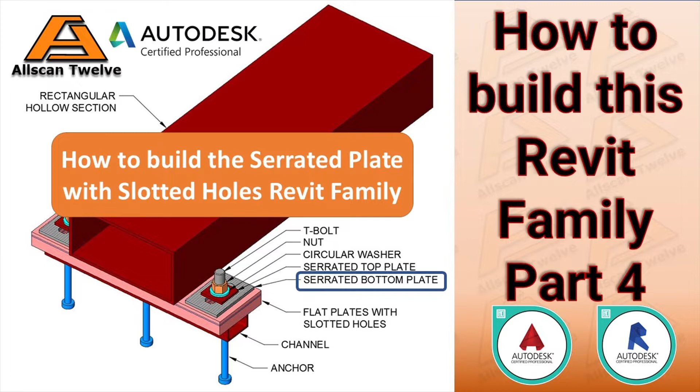Allan Cantos is back again for another video on how to build a Revit family, and for today's video, I will show you how to create a serrated bottom plate with slotted hole voids Revit family. Let's get started. Open Revit, create a new family, and I will be using the metric generic model face-based family template.

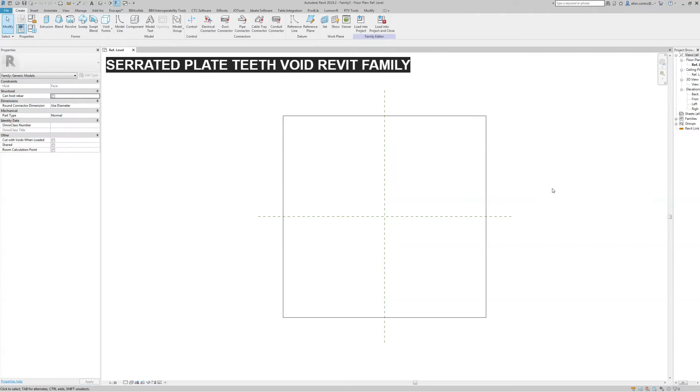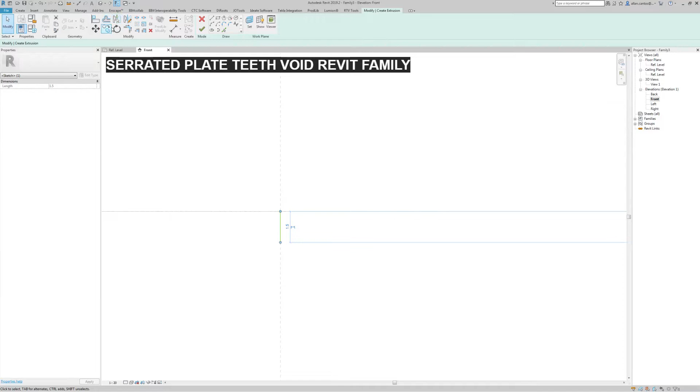We will begin by creating the teeth void of our serrated plate. So go to the front view and we will trace the teeth void profile. Create an extrusion. Make a vertical line at 1.5 mm tip and rotate it at 45 degrees as shown. Extend it to the reference level and mirror it as shown.

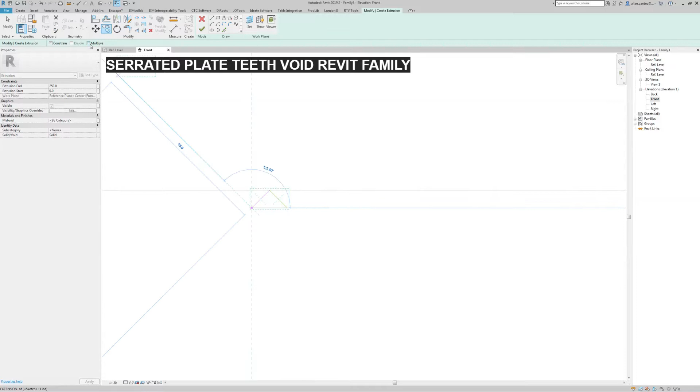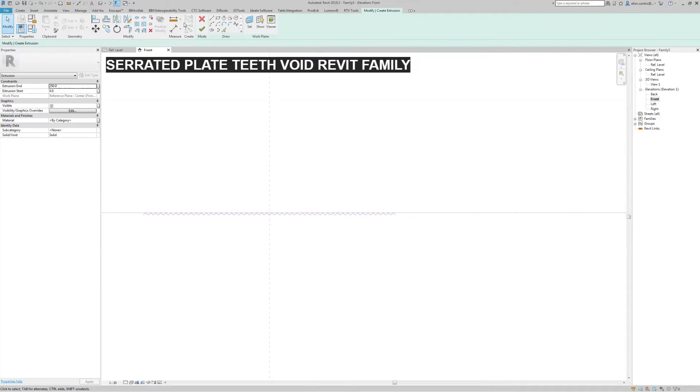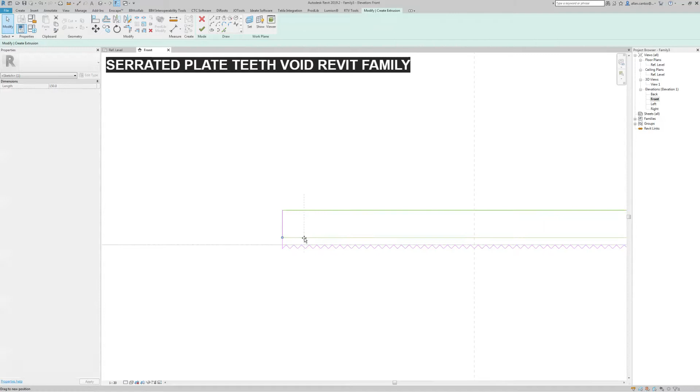Then copy it for about 25 multiple times. Next, select everything and we will mirror it to the center line. Let us complete the process of making this a closed polygon as shown. Once we are happy with the shape, click the check icon to accept the changes.

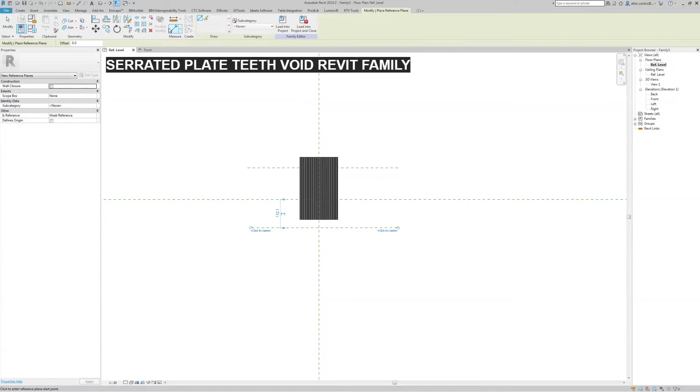Next, go to the reference level, drag it a little bit upwards, then we will add a couple of horizontal reference planes. Add dimensions and make it equal to the center line. Then add an overall dimension. Select the dimension and we will assign a shared parameter. And let's call it flat plate width.

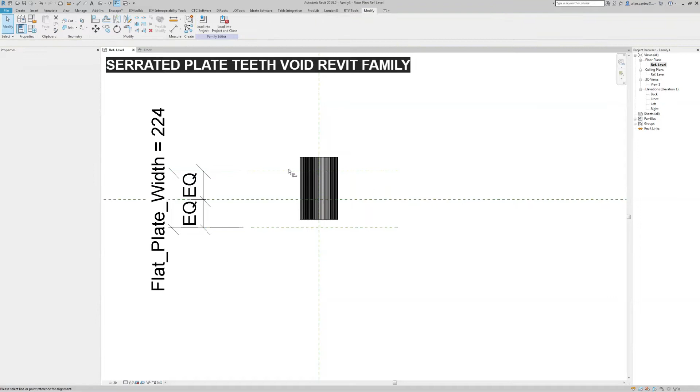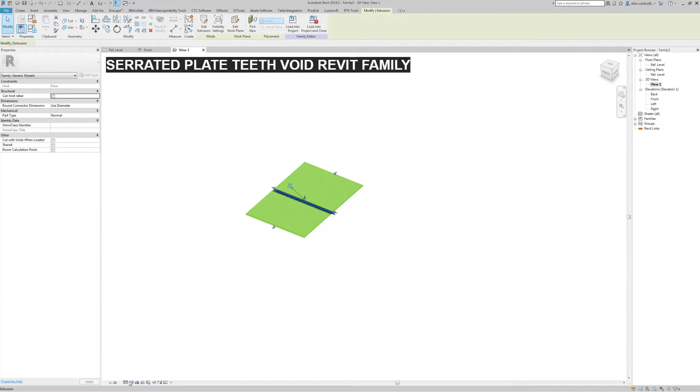Next, align and lock the shape to the reference planes as shown. Next, go to the 3D view. And we will convert this from solid to a void. Then using the cut geometry tool, let's create a void to the face. And now we have created the tooth void profile.

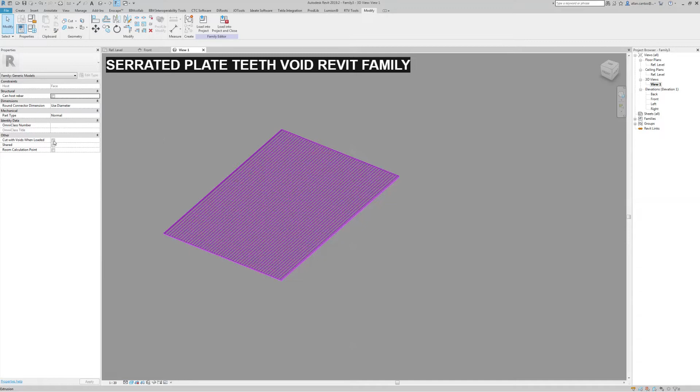Next step is to make sure to tick the box saying cut with voids when loaded. Now we are ready to save the family. And I will call it Serrated bottom plate teeth void.

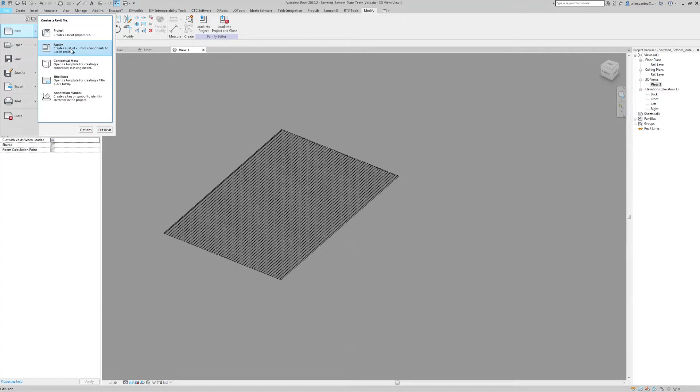Next, we will recreate the flat plate, but this time we will be using different parameter names. So again, create a new family and I will be using again the metric generic model face-based family template. The process is going to be the same from the last video. The only difference now is that I will be using different parameter names.

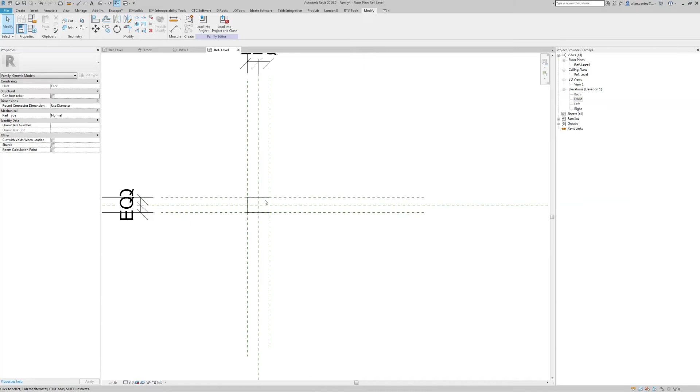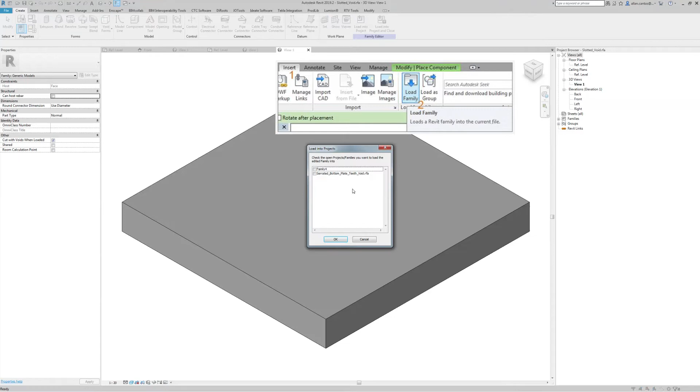Now that we have completed the modeling of flat plate and tested it to make sure it is working properly, we can bring in now the slotted hole family we have created in the previous video. There are two ways to do this. You can either open the family and load it to the project, or by using the insert menu on top, then select load family.

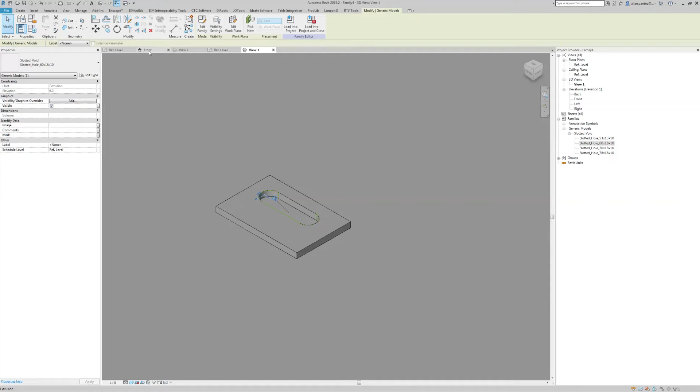If you placed it in the wrong orientation, select it again. Just press the spacebar to rotate it 90 degrees. Next, go to the reference level, then align and lock the slotted hole to the reference planes as shown. As you may recall from the previous video about how to create the slotted void Revit family, we did not tick the share checkbox, and because of that, I can link the nested parameter to the host family parameter.

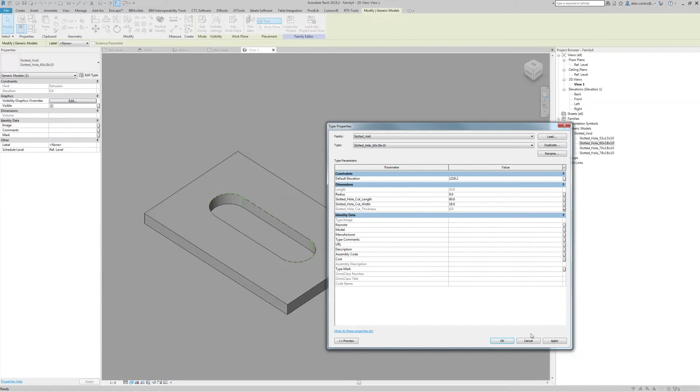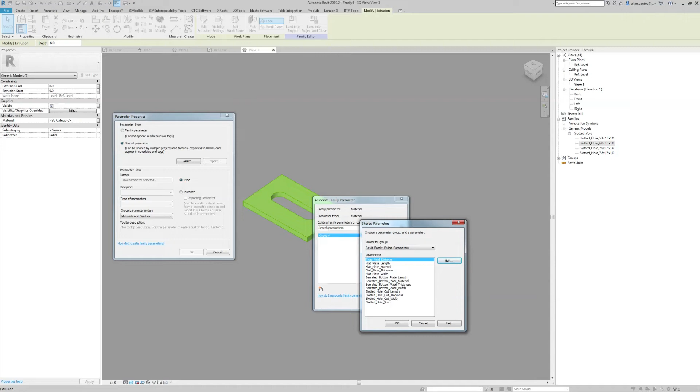Next, let's assign a material and add a new material type parameter as a shared parameter. And let's call it Serrated bottom plate material. Then click OK, another OK, and select the newly created parameter, and click OK, then OK, and another OK. Then let's give it a test.

Next, let's create a new material by duplicating the default. And name it Serrated bottom plate material. Change all the pattern to solid fill. And choose the color of your choice.

As you can see, there is no way for me to control the size of the slotted void. So what I'm going to do next is to assign a family type parameter to the slotted void called slotted hole size, which we have created in the previous video as shared parameter. Then I'm going to group it under visibility and click OK.

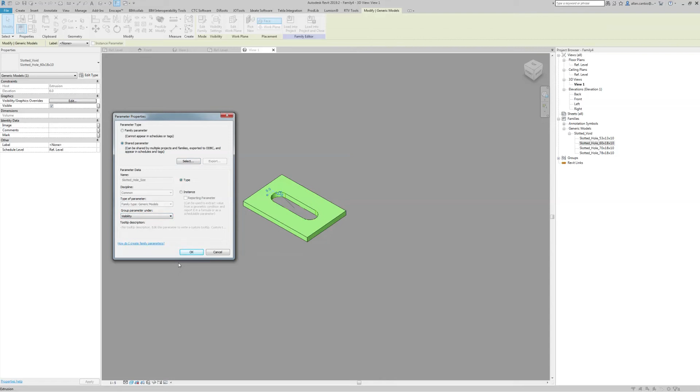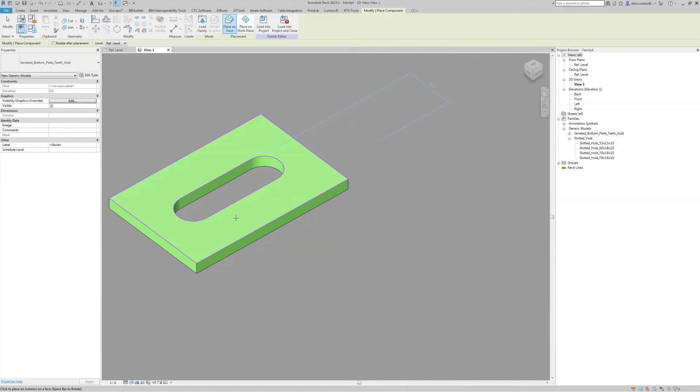Next, let's go back to the Serrated plate teeth void family file and let's load it to the project. Since this is a face-based family, we can host it to the top face of the flat plate. Next, go back to the reference level and we will align the newly loaded family center line to the host center line.

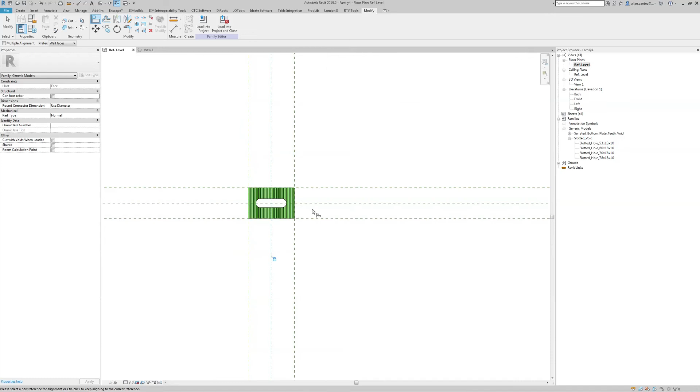Similarly, with the slotted void family, I can also link this nested parameter to the host parameter. So next time we update the width parameter of the host file, we don't need to update the parameter value of the nested family. Let's give it a test. As you can see, it is now working parametrically.

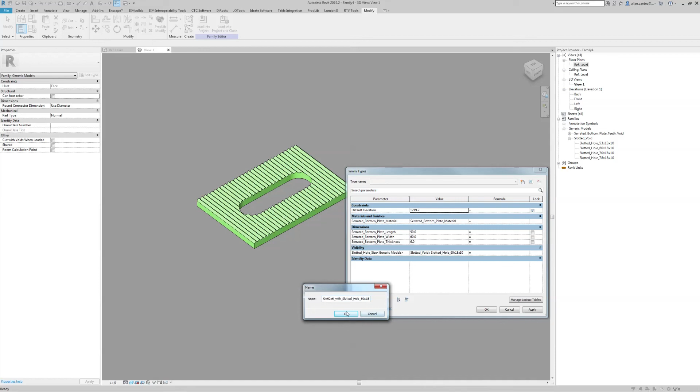Next, we can now create multiple types according to the specific sizes. If you know the sizes and have added them as new types, we can now save the file and let's call it Serrated bottom plate. And this concludes the video for today. On my next video, we will be creating the serrated top plate.